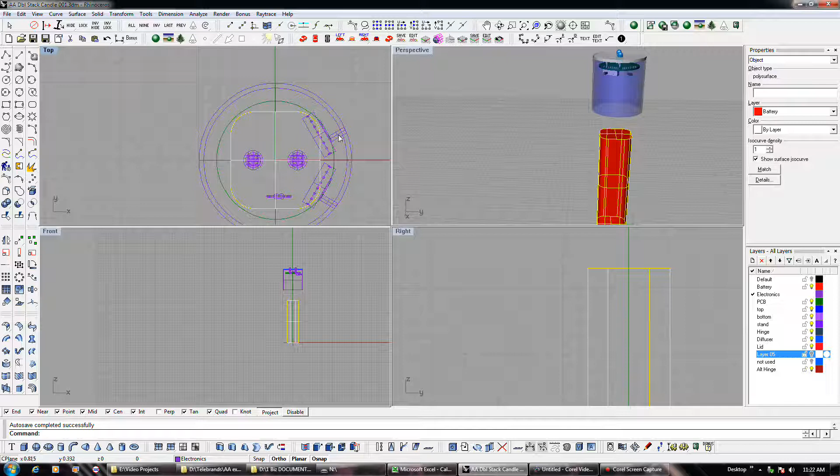And the switches. These are the two things that do affect the design form of this thing a little bit, to one degree or another. Because of this, we can't make the housing too skinny, for example. We can make it as wide as we want, but we can't make it too skinny. Because of these, this also dictates how skinny we can make it, because, frankly, if we tried putting two switches like this in a tube like this, let's say that was the outer housing, well, we couldn't fit that thing in there very well, let alone two of them.

And even if we could, that switch might barely stick out of there, because remember, we've got to have some wall thickness and so forth we've got to account for. So we couldn't actually take that tube right to the end, because there's got to be some material between the corner of this switch and the wall. Plus, we've got to have allowances to actually accommodate that, particularly given the 3D printer. We've got to at least have like a 25 mil allowance around this thing, if not better than that, so it doesn't fit too snug, because otherwise we've got to go in and try to file it down, and that's not good.

I could actually print on my 3D printer at a higher resolution setting, and tweak it and get it closer to reality. But in practice, it's usually a good idea to try to design around loose tolerances, particularly if you've never taken your product to a production run before in plastic. Because imagine if you went and spent $20,000 tooling this part, and it was based on a switch that you had too tight of a well here, or accommodations for the switch.

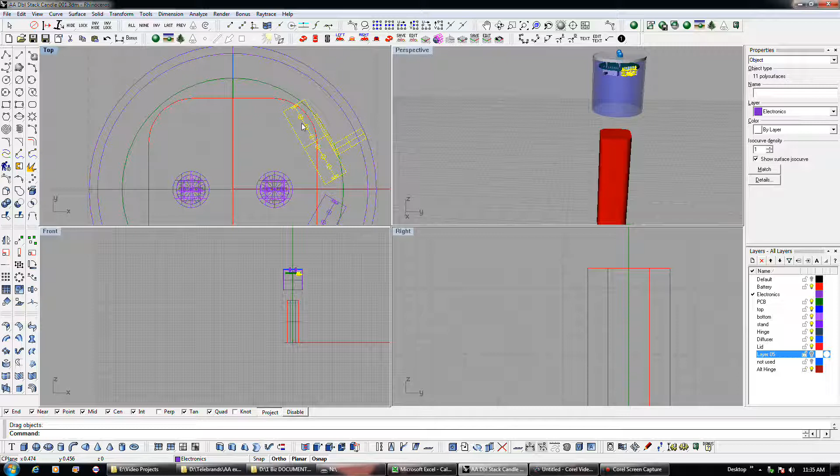So it may cost you a little bit more money in initial production, but once you get your profits up, you can redo the tooling and get it right when you can afford to. That's why that's a good practice when it comes to 3D printing and getting a business started up that's based around plastic parts that you're going to have somebody tool up and produce for you, and you do the assembly of.

It's just better to make sure you cover your butt on that by making sure your initial parts have loose tolerances and that they will fit, just maybe loosely. There are ways around that, using tape or, like I said, epoxies or whatnot to make up for the difference if it becomes a big issue.

So again, better to be a little too loose than too tight, because with too tight, trying to machine plastics is hard. Most injection moldable plastics are thermoplastics, and given that fact, they usually don't tool or machine well, which means that trying to have somebody fix it for you is going to be really difficult, to say the least. It almost mandates that you redesign the part and retool it to correct that flaw.

Whereas if you make the tolerances too loose, if your design will tolerate that, you're better off with your first production run being a little too loose than a little too tight. Always, because otherwise you're stuck with a batch of useless parts, even though it was just a test batch, and you're going to have to redo the tooling, and that's what's going to get you.

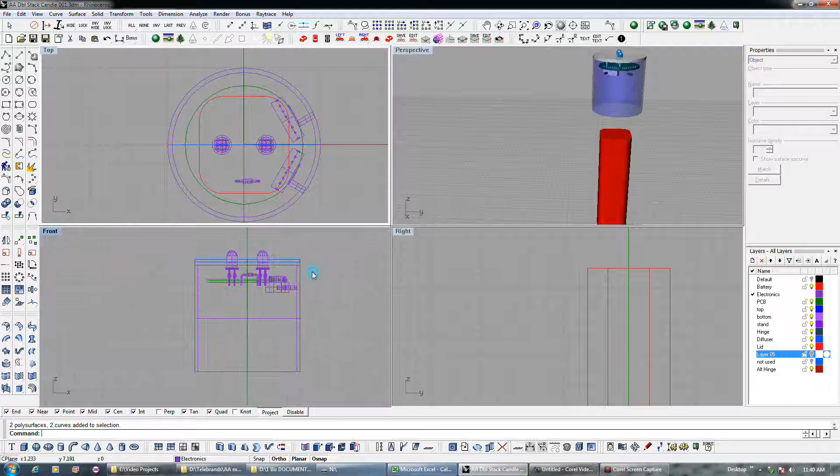Okay, on this ring, the principal constraint here is actually this inner wall. So let me go ahead and move this down to the base here so we can kind of work. Like I said, we're going to have this little guide ring that this piece attaches to, but it's going to attach by glue. And this little guide ring will actually be pretty close to the actual cylinder wall.

In order to assemble this thing, I've debated about that a lot. I've actually got to attach our guide ring that we're about to design to the housing and glue the housing all together first, and then glue this tube onto it after the fact. That's the only way I can really conceive of assembling this thing so I can get to everything properly. So I'm going to be applying glue to a 3D printed plastic ring that's already around a 3D printed plastic case. I do not want glue seeping off into that and gluing the ring to the plastic case.

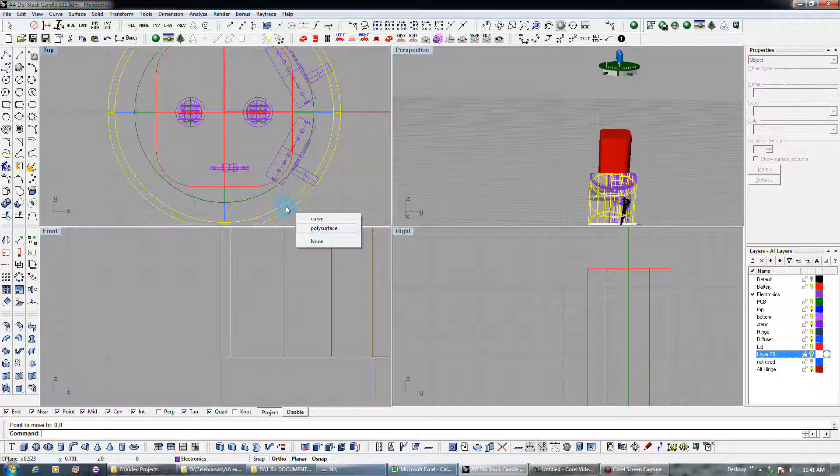So what I need is a little wall here that will prevent glue from seeping near the cylinder. That wall's got to have some tolerance for error, because remember, the 3D printer has got that tolerance for error. So I've got to come in with at least a 22 mil inset, because that'll probably be quite snug. It's going to have to be a thin wall though, because I don't want a great deal of distance between this tube and the plastic housing. So I'm going to keep this wall way less than 1/16 of an inch.

So say about 0.037, I'm just going to arbitrarily say, just as thin as I think I can get away with on 3D printing, because I could probably go thinner than that. I don't want to make it too thin though. I'm going to go ahead and go with 0.03. Okay, so that will be the inner wall of the ring.

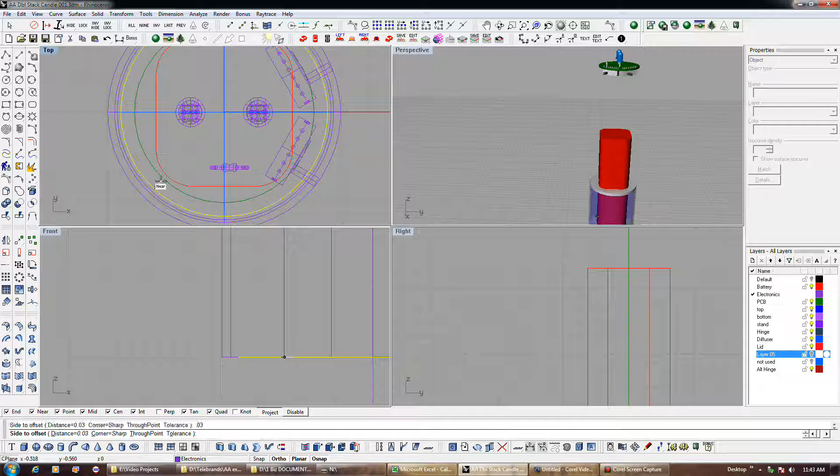Now on top of that, we've got the inner wall, the actual housing itself, which I'm going to allow at least 25 mil, because it's got to be loose enough to where this thing's going to be able to slip around it. I'm probably going to want to put that at least a 30 mil tolerance. That'll give us a total of 60 mil, because it's 30 mil on this side and 30 mil on the other side. That should be loose enough, because we want this to be able to easily slip up and down the housing itself without getting bound up.

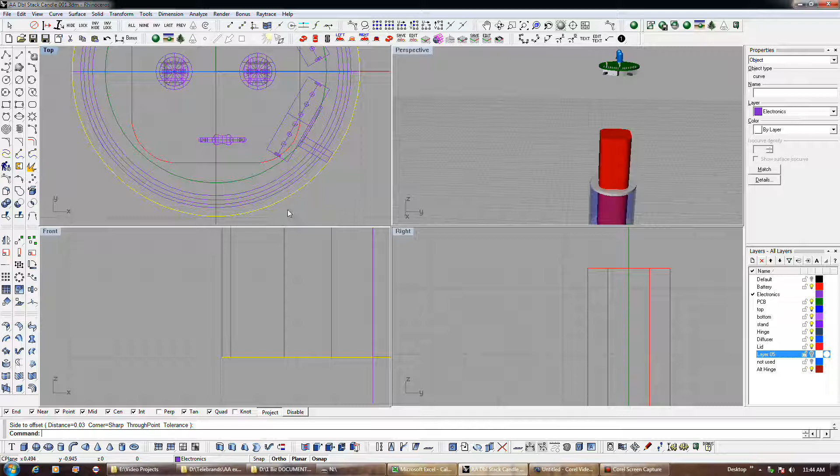So you can see how the constraint of this tube ultimately dictates how big the outer wall of our housing can be. These two here, that's the wall of the ring. Now the outer wall of our slip ring can be this. Let me take a line and do a measurement on it. So it'll be 111 mil, which you can see right down here, how long the line is.

So make sure it's not saying center, but yeah, it's 111 mil. That's almost an eighth of an inch, which is 125 mil. So that's an adequate thickness.

So basically, what I'm going to do is grab this curve and this curve here and extrude this out. Now, this little ring, I don't want to get carried away with it. And again, watch this down here. That tells us how long the extrusion is. So that's an eighth of an inch right there. But I probably want it a little more than an eighth of an inch because I've got to put some guides in it. So I'm going to say minus 0.165, let's say. It's rather arbitrary.

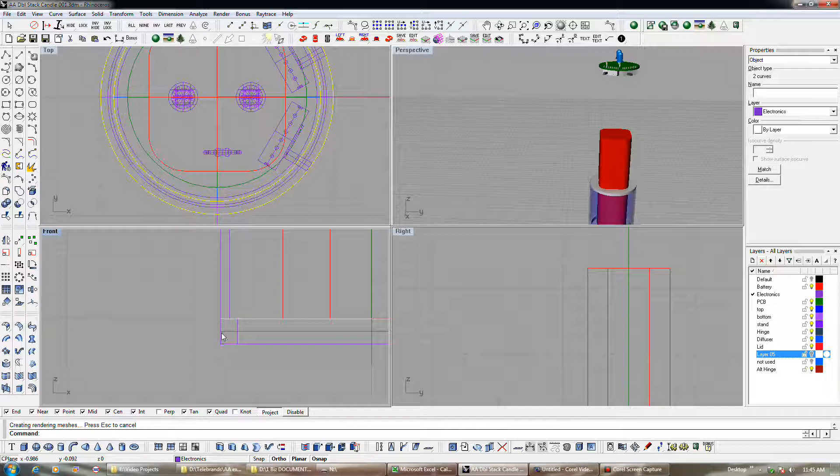A lot of this stuff is kind of arbitrary, and again, it's a proof of concept, so this isn't a principal constraint. A lot of these measurements I come up with just out of instinct too, by the way, so keep that in mind. Anyway, that's got our ring right there, okay? And I used a minus because that's just a quirk of Rhino. Minus made it extrude down, plus would make it extrude up. So I put a minus 0.165, 165 mil.

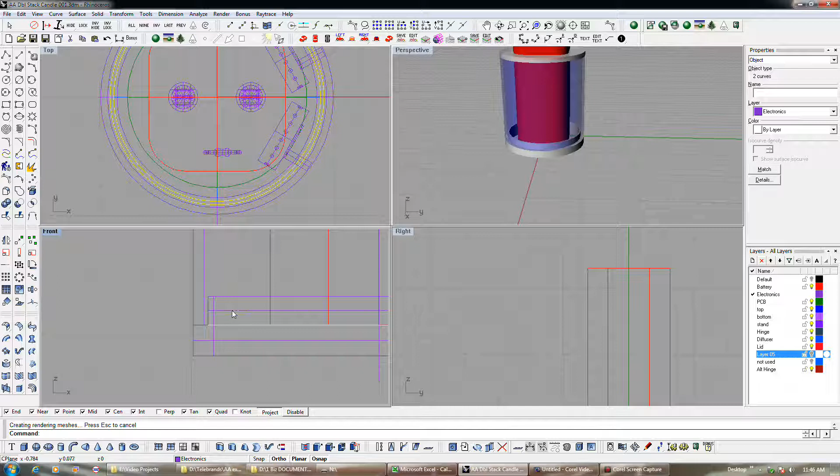Okay, now that we've got that in, I can take this curve here and this curve here, and we can extrude. It's advisable sometimes when you're doing, well, we'll just try it this way and see if it works. I'd like this to be at least, say, 0.15, and notice I didn't put the minus sign in that time, so it extrudes up and you can see what we did there. So then I want to take these two parts and try to union them. Okay, so bingo, now they're one part. I did a Boolean union on them, so we've got our ring.

So this tube will actually sit right in there, so I can apply glue down there when this thing's already on the device, and then I don't have to worry about the glue leaking out and getting stuck to the housing, so that it fixes the thing in place. Now the other thing we're going to need is 3 guides. I'm going to use the rule of 3s on this, because we're going to have 3 tiers of LEDs, which I haven't laid out yet because I was trying to figure out the tubing.

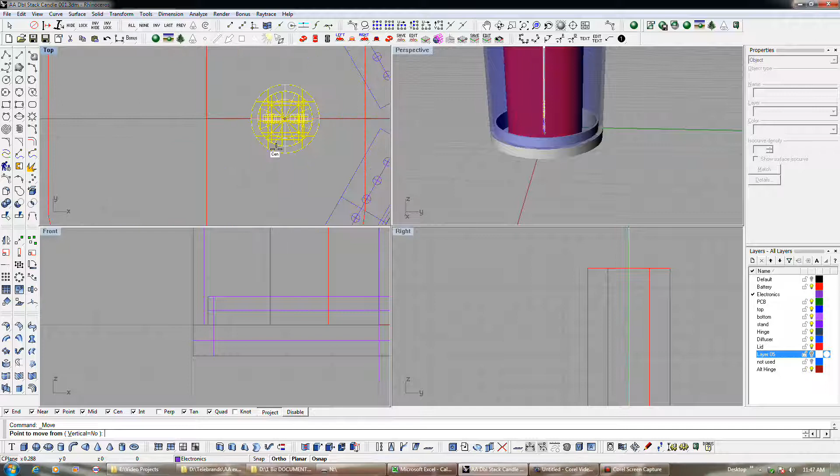But now that we know that our housing tube is going to be no smaller or no larger than this, I can actually look at laying out the LEDs now. So I'll go ahead and do that before I do anything else. Let me just delete that, and just move this sucker and put it at origin. This is why I always try to work with 0, 0 on the origin, so when I'm entering things in here I can use 0, 0, and I always put it at the origin of our working plane. And then I'll move things from there. This is sort of arbitrary at this stage where I put it.

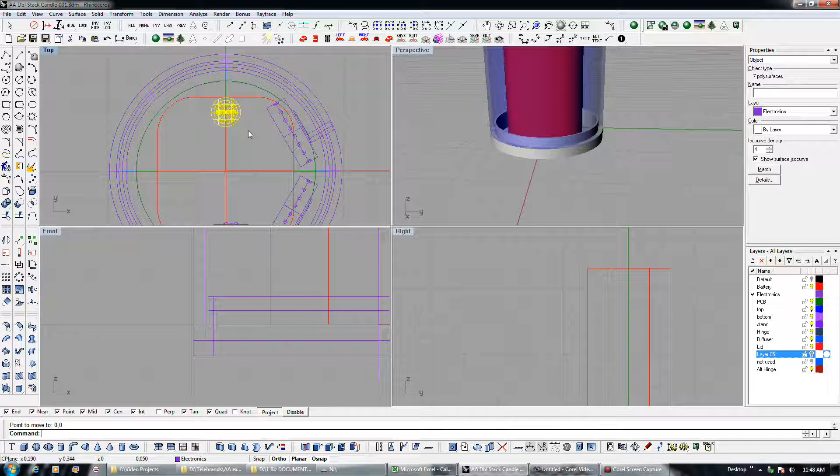But for this design, we don't want to come too close to the ends. In fact, we want it to be about right there. I'm just kind of guessing, but again, that's the whole point of prototypes. I don't want it to come too close to the end because these LEDs are 55-degree LEDs, so they'll have a cone to them, which I've actually drawn. That's one of the nice things about CAD. You can actually draw a cone with a 55-degree angle on it and kind of see what's going on with it.

But you want to keep it a little bit far away from the edges, and try to center it a little bit. But I don't want to get it too close to the middle either. You'll see why later, when I start drilling holes in this little diffuser here. It's because I don't want light to peek through the holes too much. So there's a little bit of a compromise. A lot of engineering and design is about compromise.

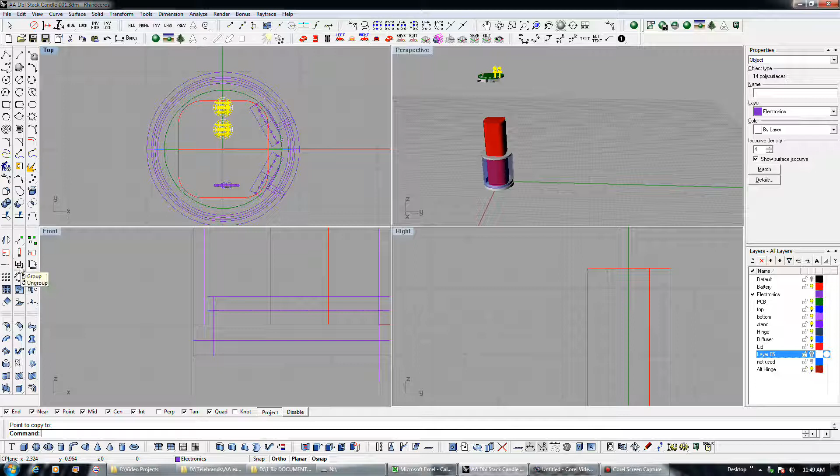Let me copy this because this is actually going to be, I want to keep these things pretty close together. And again, we're probably going to have to move them still. But there's going to be a total of 6 LEDs in this. So, 360. So that's basically sort of what we're targeting here LED-wise.

Now again, I'm going to have to take another look at this in the future to make adjustments on this, because I'm still wondering about the cone. But see, it's actually not that big of a deal now that I think about it, because basically in LED candle mode it's only going to use 3 LEDs typically, and when it's in flashlight mode, there'll be one setting on the switch, and that's when all 6 LEDs will come on at full power basically.

But when it's in flashlight mode, the diffuser lid will actually be retracted around the LEDs, so you won't really have to worry about it. Whereas when it's in candle mode, normally it'll just be the center LEDs that are actually shining up and reflecting off that diffuser, so that keeps them nice and centered. So therefore, I might be able to actually move these things out a little bit. So let me go ahead and do that.

And again, that's why I'm making this video, so you can see some of the decision making that goes into actually doing a design. You may find it a little boring, but you can learn some things out of this if you've never designed anything before, period.

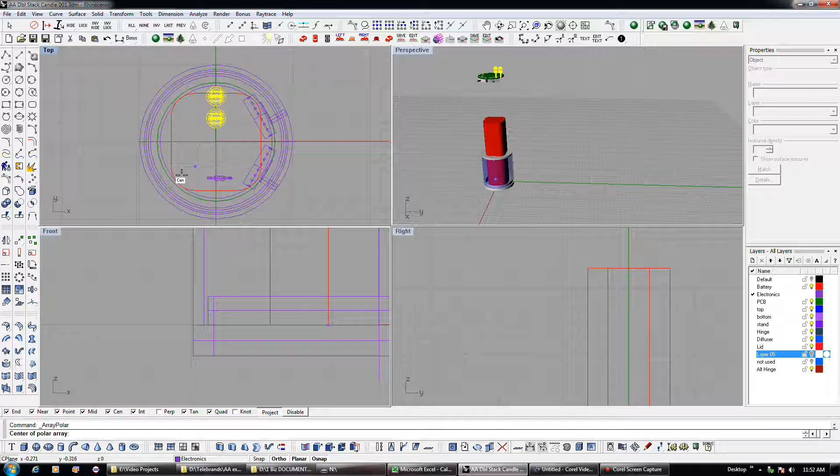So I guess I'm kind of stuck with this layout. So I've answered my own question, because I was going to try to see if I could move the LEDs even further out, again, to get this LED further away from the center than it is, but I can't do that. Okay, so let's just go ahead and repeat what I did before then, because it looks like we're basically stuck with that arrangement, so that's okay.

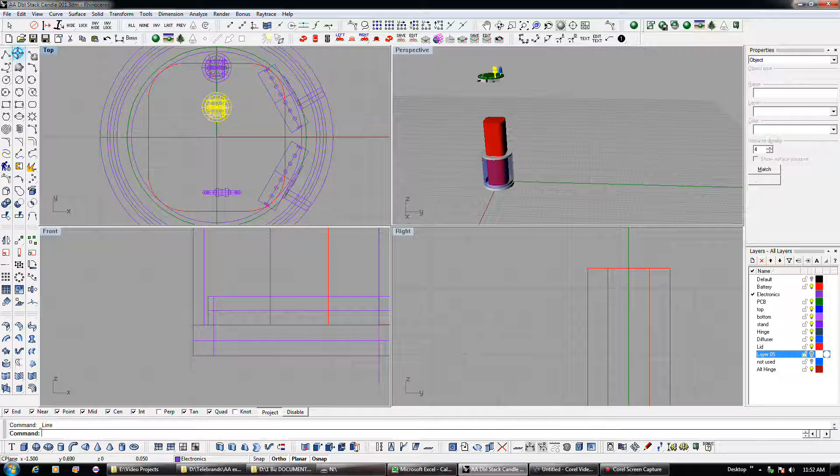But I don't want these LEDs too close to each other, because when I do the routing of the acrylic, I don't want this piece breaking. So I'm probably going to have to separate these out a little more. So something like that, because acrylic's rather brittle, and I don't have a whole bunch of this stuff, so I want to make sure I don't squander it. 84 mil should be enough. You can see down there, 84 mil should be enough. That's the 1.5/16 or so.

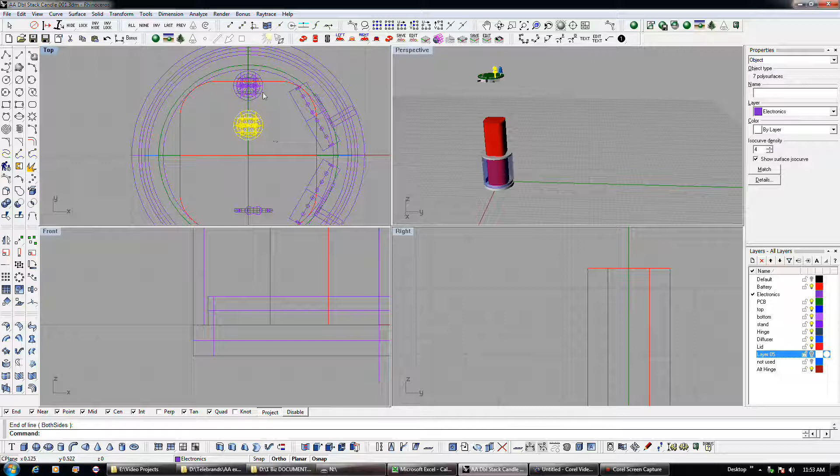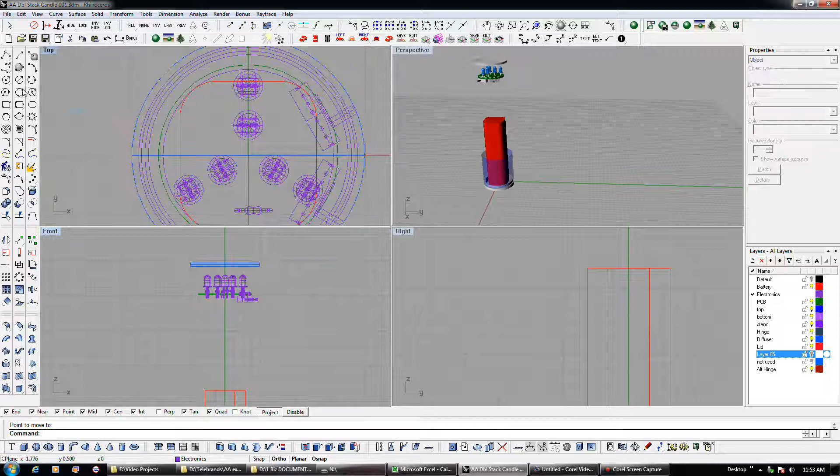Again, I wish this weren't so close to the middle, because, in fact, I'll show you why here, if this really is going to be the final deal. I mean, I can always redraw the diffuser if I need to, so let me show you what I'm doing here so you're a little less confused. I'll go ahead and bring this up here. Okay, now let me go draw some tubes here so I can cut holes in that diffuser. Okay, it's from the center.

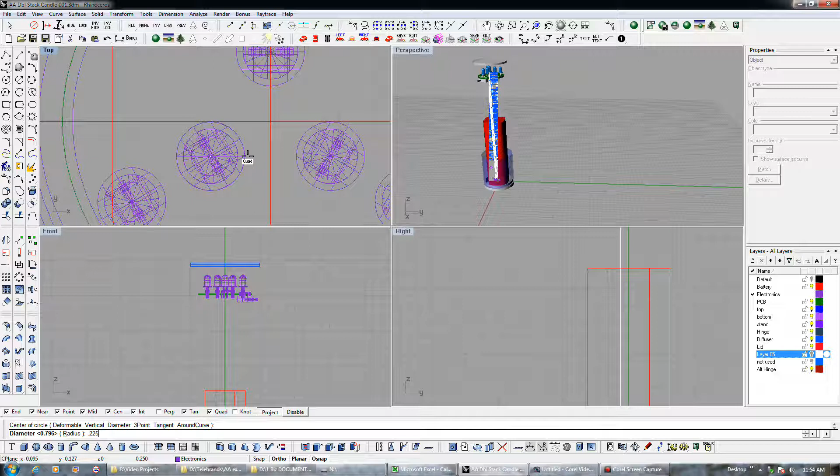Now this is the inner wall of the LED, so it's about 200 mil, but make it about 220. I'm going to make it about 225. Actually, because the outer wall is 250, yeah, I'm going to make it about 225. Because remember, I've got to take into account the error in the 3D printer. And if I had to drill these holes out a little more, I could.

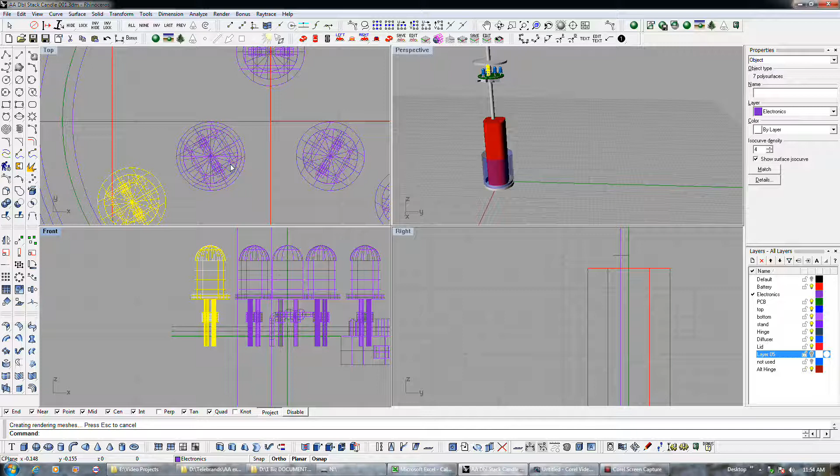I mean, I've had to do that once or twice by making them too tight, but I don't want them so loose, because you can see on this LED there's this little lip, and it's nice if that lip doesn't slip through the hole. Of course on this it doesn't really matter though. Yeah, that's right. On the diffuser it doesn't really matter. The hole can be a little bigger.

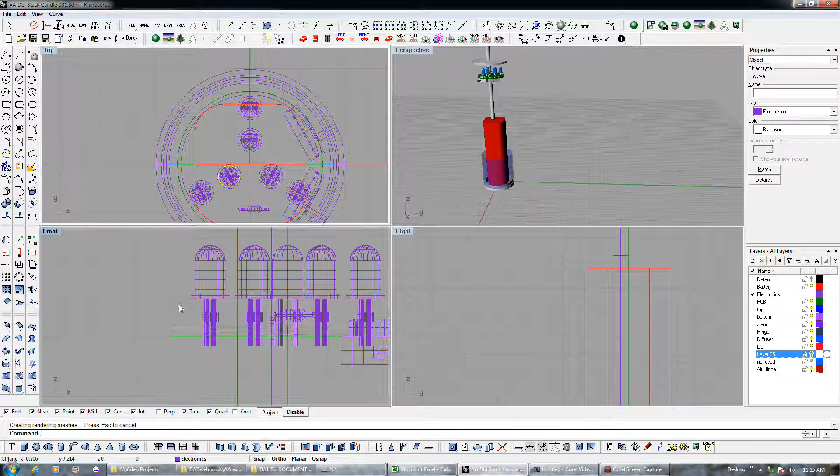Now when I'm actually drilling a hole in the housing for the LEDs to peek through, that's when I'm going to want to use a hole that's like 225 mil. But for the diffuser, that hole can be bigger because it's not holding the LEDs into the housing or anything. So, doggone it. So I can actually oversize the hole a little bit like that, but I don't want to get carried away with it, and you'll see why.

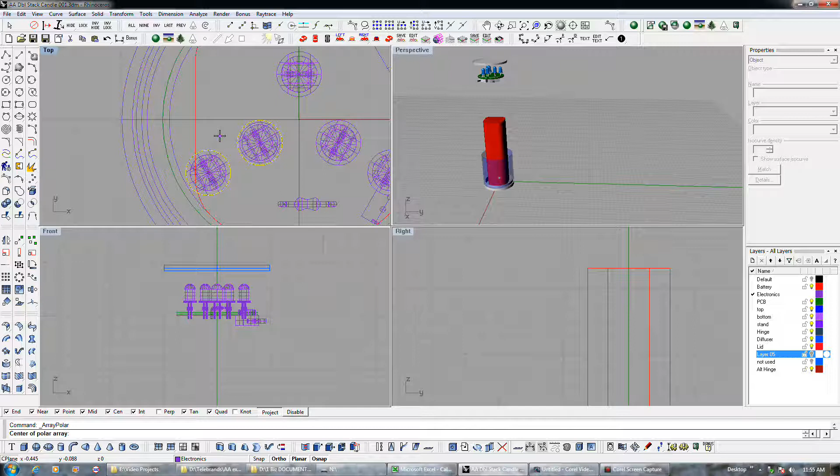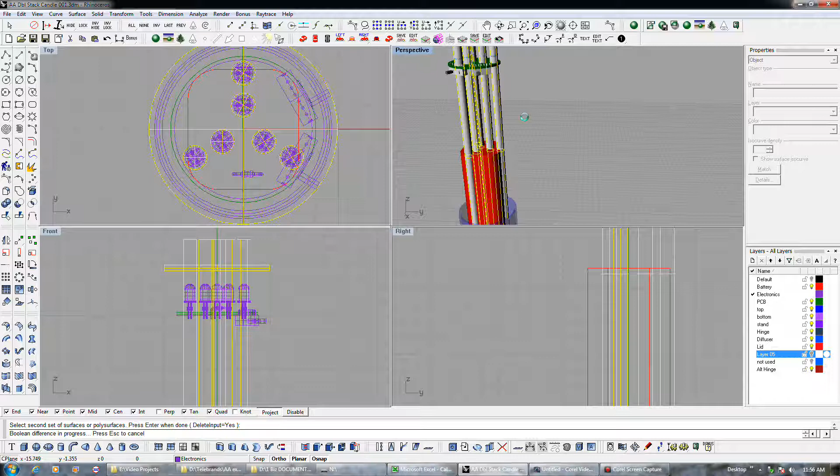Okay, let's array these around. Hold on a minute. Let me just extrude these, and we'll array these around. Okay. Now I'll go select this diffuser and I'll do a Boolean subtract on it and grab those suckers. And voila, now we have a disc with a bunch of holes in it.

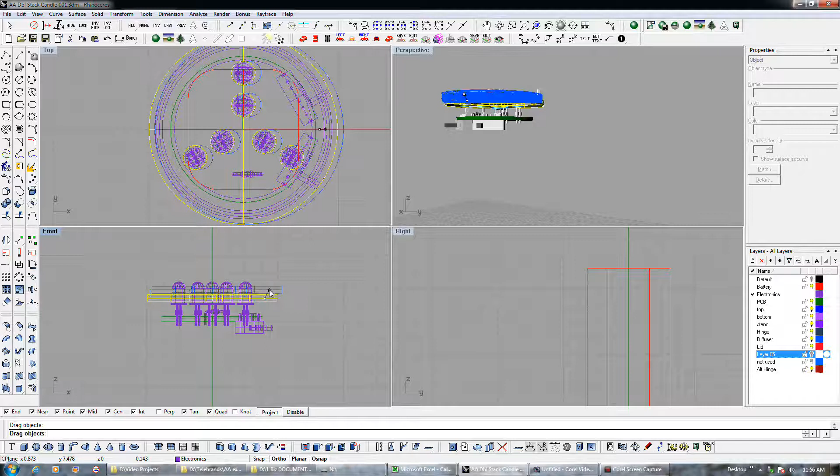Okay, now this is what I wanted to show you. Keep an eye up here: when this disc is in flashlight mode, it's going to be around the LEDs like that, so they poke through this thing. Probably not quite that far down, but probably something like that. But again, they have narrow cones, so the light actually protrudes out of almost the tip of the LED, not quite, but almost. So the point is that all LEDs would be available in flashlight mode.

Now when you have it in candle mode, remember this diffuser is attached to the tube there, you'll raise it, and then it will have a little track on it that allows you to slip it out of phase like that. Okay, so the holes aren't exactly aligned with the LEDs. That's the whole idea. So it'd be like that.

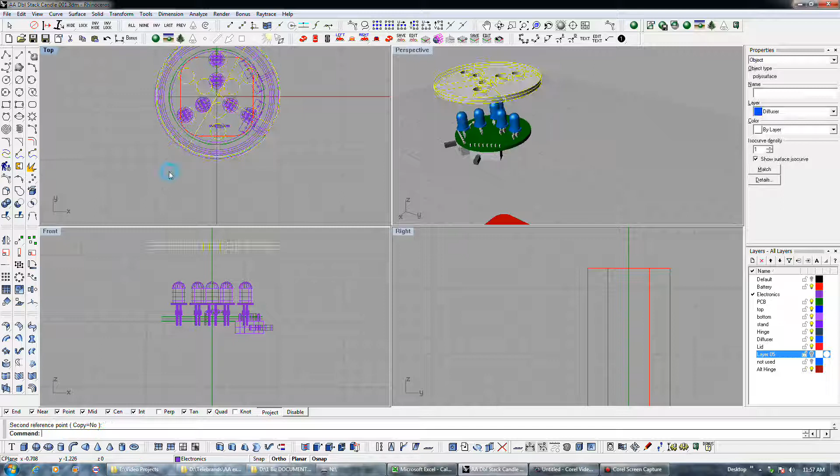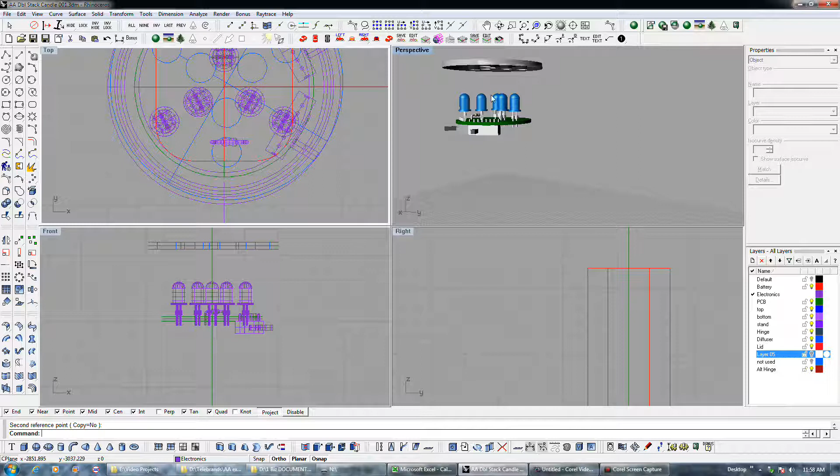So it's completely out of phase, but that means that an LED under here, for example, its light will hit this part of the disc where there's no hole in it and reflect off. But again, remember these LEDs have a viewing cone to them, it's modeled as a 55-degree off-axis cone of light. So like this LED, the higher this disc is, like if this disc were up here, in fact let me go ahead and draw you a cone if I can.

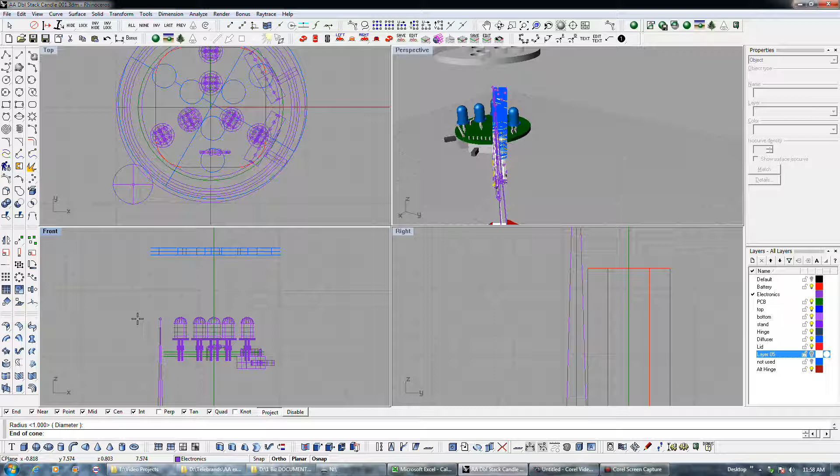Let's see, I think it'd be better done with this. No. Yes, I can't get the... I need to draw a precise angle. I've done that before. Don't have it in here. Trying to think of the easiest way to go about this. I guess this would be the easiest.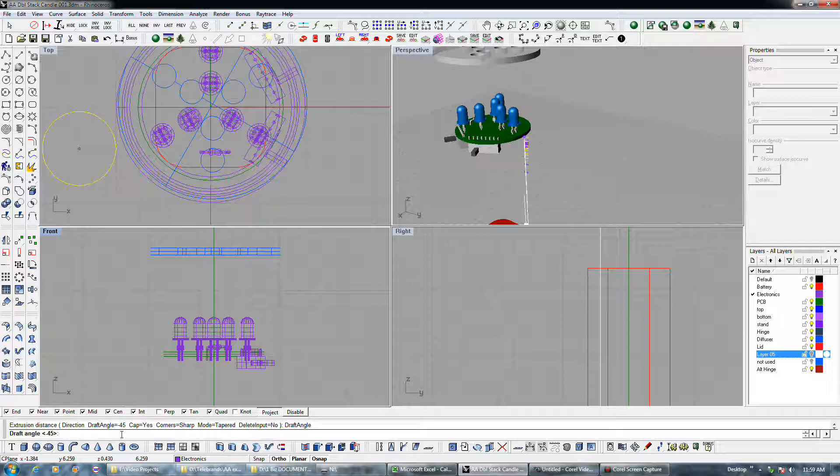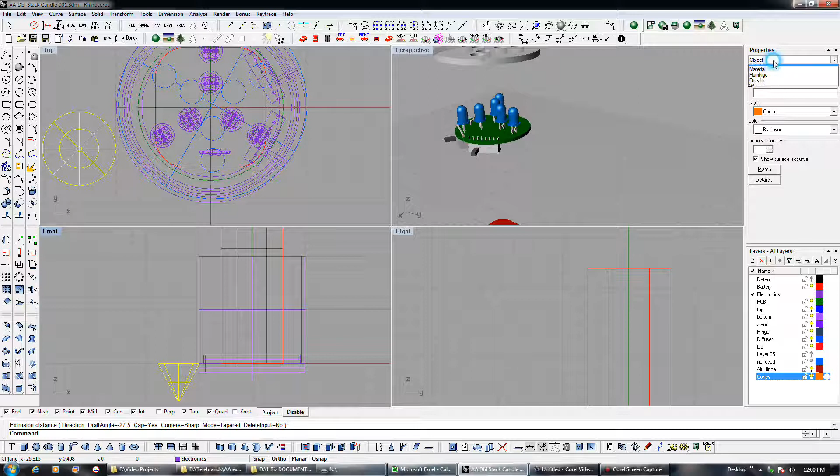Okay, so this is going to be the draft angle, so it's going to be 1/2 of 55 degrees, so 27.5 degrees. That's our draft angle. But it's got to be negative, so minus 27.5 degrees. Okay, so basically, let me go create a cones layer, move this to it, and go ahead and change the color of it a little bit. Okay.

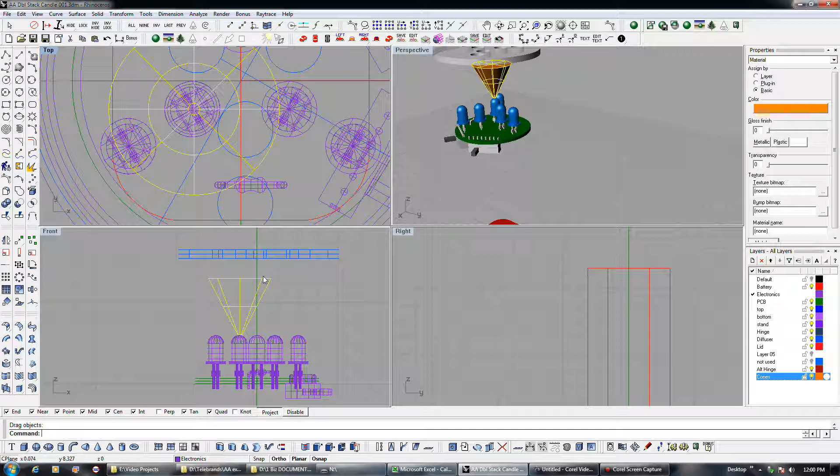Now if I center this cone on one of these LEDs here, you can see, even by the side there, that if it's right here, you can see where the cone of light is actually coming through it. So basically through this hole here and this hole that's under here, some of the light would be leaking through. So that'll actually create little spotlights that shine up on your ceiling when it's in diffuser mode, particularly coming from our all-important middle LEDs.

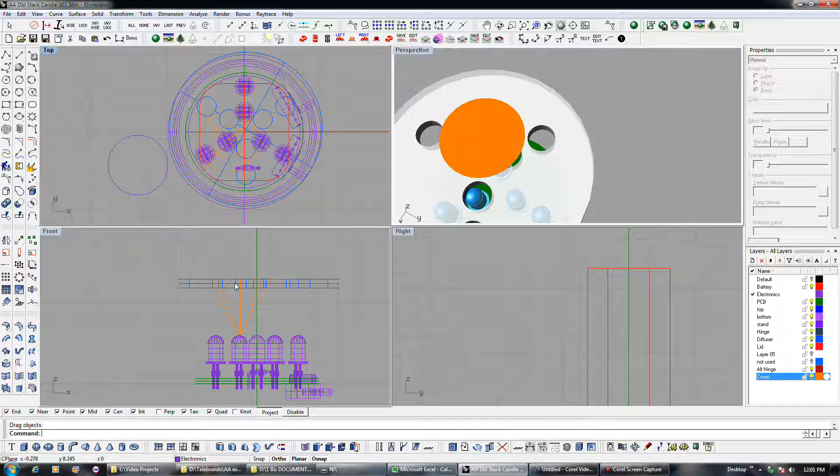But again, what I may end up doing is, instead of using the center LEDs, use the side LEDs for the candle mode. But the problem is that if I put one of these cones here, it tends to bleed off to the side, which also creates not just light spots on your ceiling, but also makes your diffuser look almost dark when you see the shadow of it on the ceiling, when it really isn't dark. It just makes it look darker than the little light spots that peek through it.

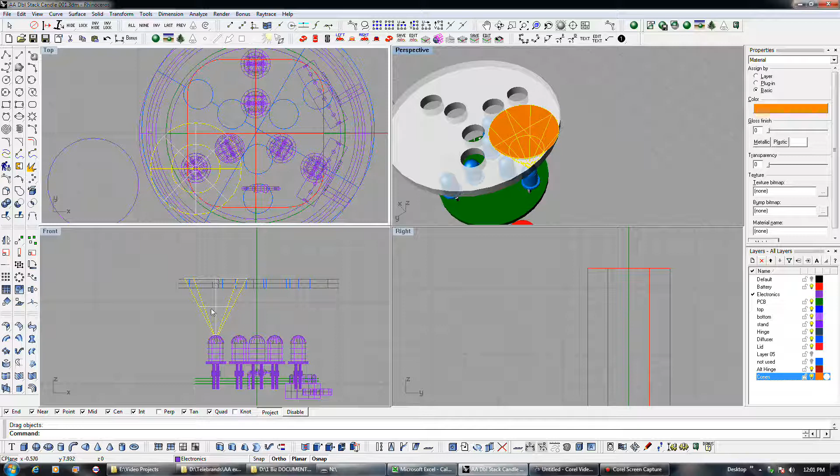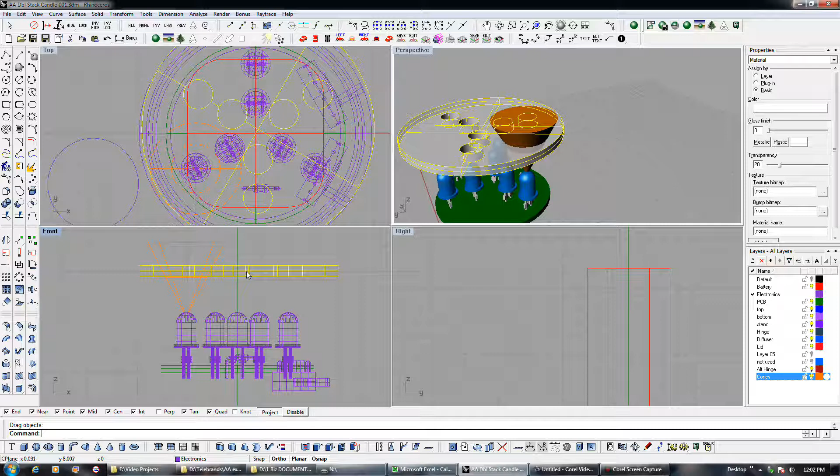But again, that's one of the things that dictates how high this diffuser should ultimately be when it's in candle mode. If you bring it down a little bit, you see how this cone now is more captured. So there's going to be a brighter spot on the disc, but it's not as inclined to bleed off the side. So the constraint on our ultimate travel, as far as how high we want that diffuser to raise, would be a combination of either using this LED for LED candle, or using this one and making sure that it doesn't come through any holes. But see, even with it being that close, it'll still bleed through some of those holes.

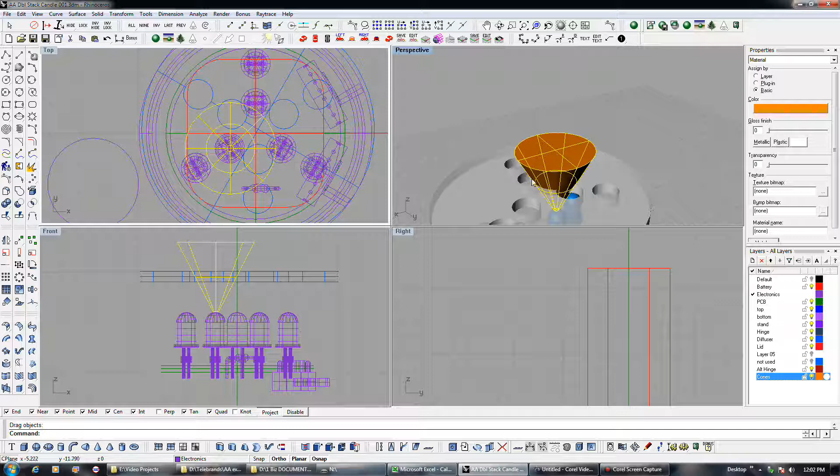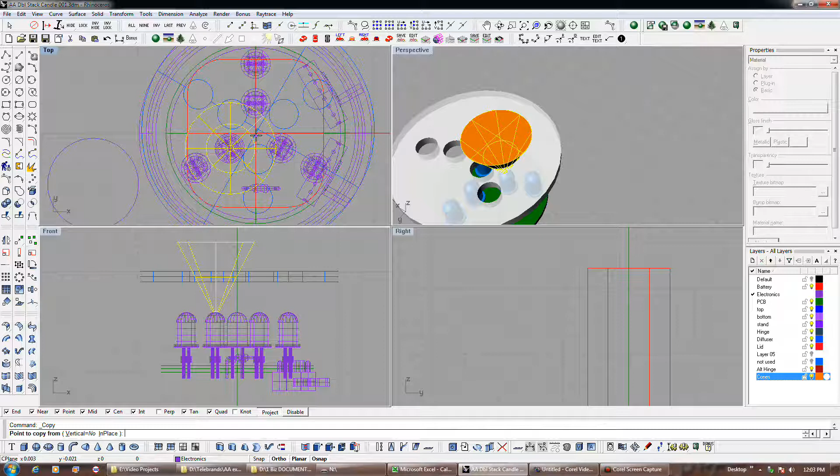So that leads me to believe that the flashlight mode LEDs, the ones that are only going to be on if you have it set to flashlight mode, should actually be the middle ones. Whereas the candle LED mode, here, let me take this and stick it over here so we can look at both at the same time.

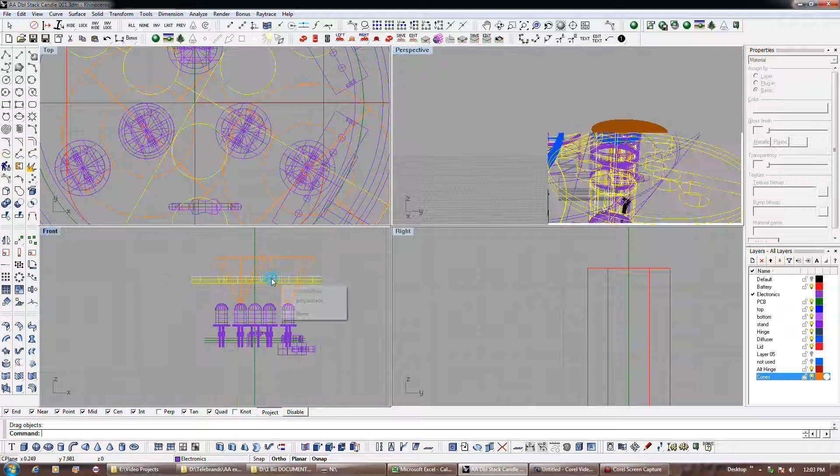Roughly center it. Anyway, the LED candle mode would best be there because none of the light will bleed through the holes, and if we make the diffuser so it goes no higher than this, then we won't have to worry about light bleeding off the edges too terribly much, as you can see here, because that's still the majority of the LED light, will be held here.

There'll still be some side lobe radiation that will come off, even with the disc being that close, but still the vast majority of the light will be within this 55-degree cone coming out of the LED. Again, there'll be some bleed off, but it won't be too terribly bright, and it'll be at a very oblique angle. So the point is, with it being right where it is here, this would be the maximum height we want that diffuser to be raised to when we travel up. So that's something definitely to keep in mind.

I'll just put a little line here too, in case I end up forgetting about it later and accidentally moving this thing, which I might do. That would be the maximum travel, and right here would be the minimum travel, depending on where the top of our housing comes from. So it's not a very big distance there. In fact, I can measure that distance with the line. You can see right down there, it's about half an inch, about 465 mil. So it's going to be approximately less than a half an inch travel. Not a very big amount of travel, but it's enough to keep everything nicely constrained.

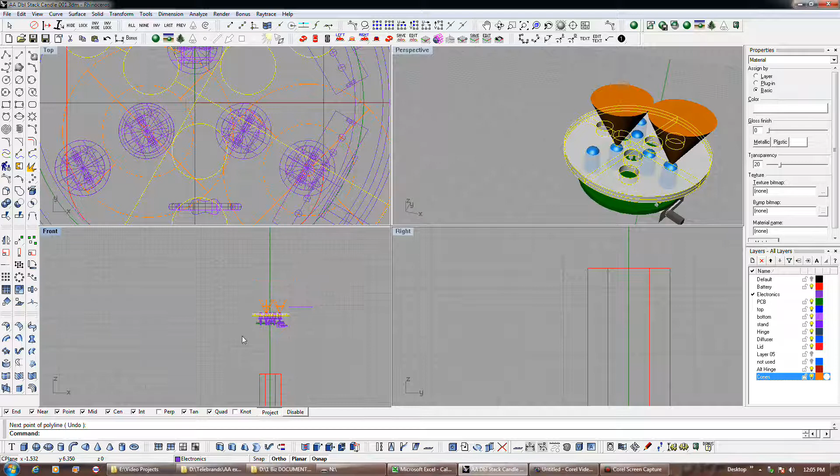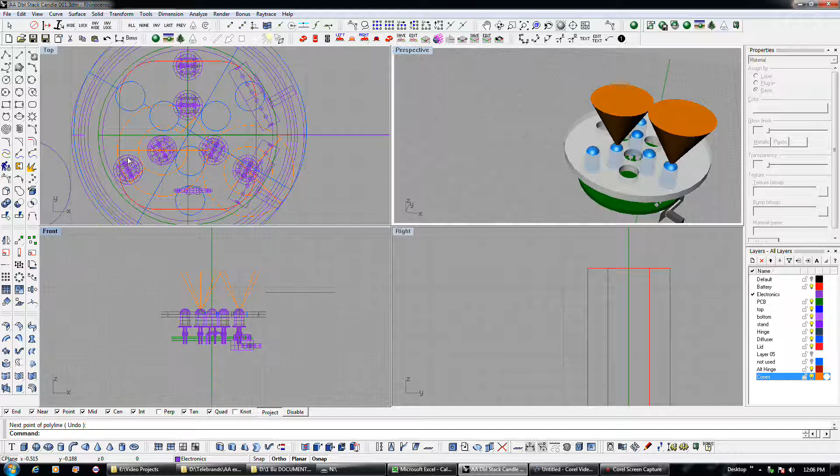At any rate, we'll probably end up using these 3 LEDs here as our candle LEDs, and these will be the flashlight only ones, since they're so close to those holes. And by the way, when this is in retracted mode, of course, it'll be actually twisted. But anyway, when our diffuser is up there, we'll have the base of our candle here, so any light hitting here will be able to bounce down, but there's going to be more of a shadow because it's not that high.

That's why I was hoping to have this thing higher than this, but with those holes in it, I'm skeptical. But the nice thing is, since this really is a question of how long this tube is, I can actually have several different lengths of tubes to determine experimentally what the best height actually is in practice versus just playing around on CAD here, before I glue anything together. So I'll leave that up to experimentation, but this is still going to affect our travel. It's not just a question of the tube, because it's going to be a serious constraint on our travel path and what kind of path I put in there. So I really can't change this later in experimentation.

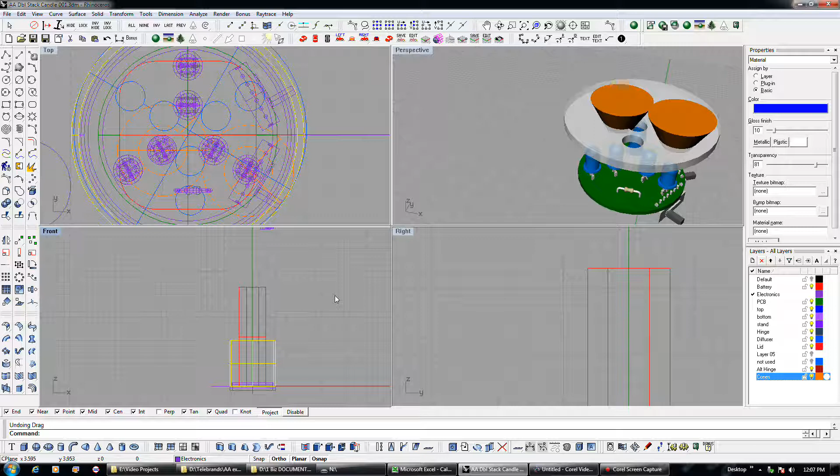And like I said, this may be confusing to you, but it's part of the design process. These are the decisions you make. You try to explore what-if scenarios, like, maybe I can just modify the tube in practice. Well, yes and no. I can't, because I've already printed the housing, and I've got to have this track in it that this little ring that we drew earlier is going to slide along, because I've got to have 3 little guides in it, like one here, and one here, that go on a track that we've 3D printed at the side of our housing, so that it can actually follow that track and stay raised when we raise it.

Another alternative is I actually could have several track positions, but still, that's a little different. It'd probably be a little tricky to pull off. I don't know if that'd work, because I think it's going to be a little bit difficult to print a track like this with a 3D printer. So I've got to keep these things in mind. And again, you'll see as we get into this what I'm talking about.

Again, this comes with a little experience, that you start thinking about what your 3D printer can and can't print, and you start realizing how that affects your designs and how you go about things. Now, like I said, if I had a 3D printer with a dual head attachment, I could print those water-soluble support structures, and I'd be much more in favor of doing that. But even if I had my printer dialed in, that can be a mess trying to clean those damn support structures off when you do overhung prints.

So again, that's why I still try to just take my 3D printer at face value and what it can and can't print, and I use that as an additional set of design constraints on what I do here. And a lot of times you'll find that those same constraints are also constraints when it comes to injection molding, although sometimes they're not.

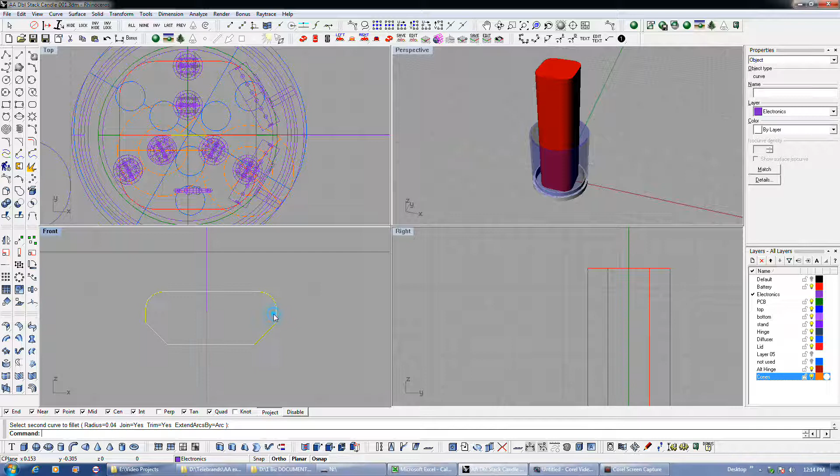But when this is traveling through a track, I want it to have smooth corners, so it's not as inclined to get stuck on something. Because remember, this piece here is going to actually end up traveling through a track. So anyway,